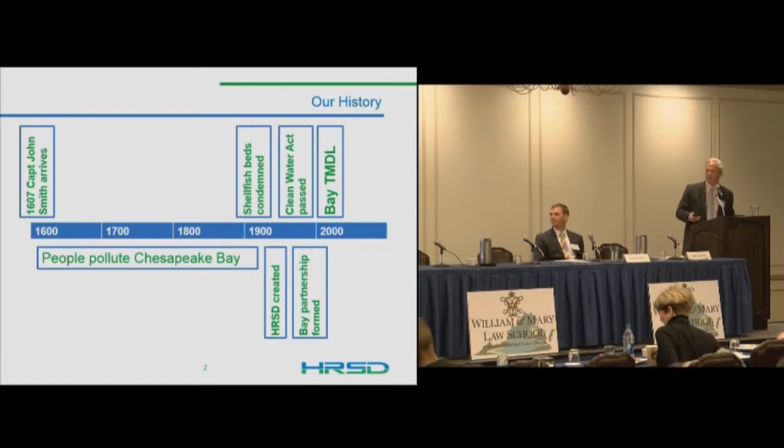So I always open up with a little quick reminder that we've been at this a fairly short period of time because John Smith was referenced earlier by Louis. He was the first person here to start polluting the bay, and we've been trying to clean it up only for a short period of time on that timeline. So we were formed in 1940. And we were actually formed out of, we're talking all morning about oysters and aquaculture. The reason we were formed was in the beds that were condemned in the Hampton Roads in 1925. People were getting sick from eating the oysters there.

Of course, at Old Dominion, we don't move too quickly. It took about 15 years to come up with a proposed solution, and we actually went to public referendum in 1938, where it failed. We couldn't get along as a region then either, and it was a nasty political battle, and the folks for forming a regional entity to deal with clean water were not able to get a majority, and they retooled it and came back in 1940, and we actually were formed by public referendum. So we like to think of us as the first grassroots water-focused environmental organization in Hampton Roads.

So who are we? We're a little different. For those who don't know, we are a political subdivision of the state. The governor does appoint our commission. We have 8 commissioners. They're typically citizen leaders. It's not a lot of cachet when you help your buddy get elected governor and you get appointed to a sewer board. Cocktail party conversation just isn't as good. So we get folks that really just want to give back in service to the Commonwealth, and we've got a great commission, very supportive of clean water and doing the right things for the Commonwealth.

Just quickly, we serve about 1.6 million people, or roughly 20% of the folks in the Commonwealth. We have a large service area. It goes from the Middle Peninsula all the way down to the Carolina line. And so we process about 150 million gallons a day. We've got capacity to about 250. It's a real challenging business proposition when you really sit down and think about it.

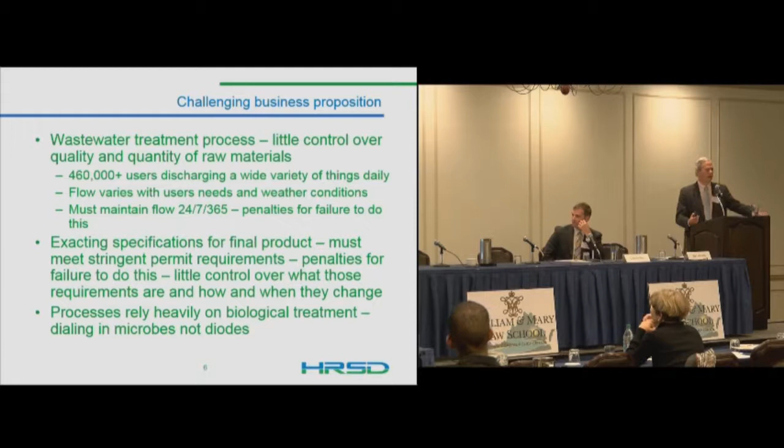If you were in manufacturing, you had no control really over the quality or quantity of your supplies that came in, and you had highly regulated and exacting specifications for your product at the other end. I don't think many of you would go into that business. It's a very challenging business from that perspective, and that's really what we're after.

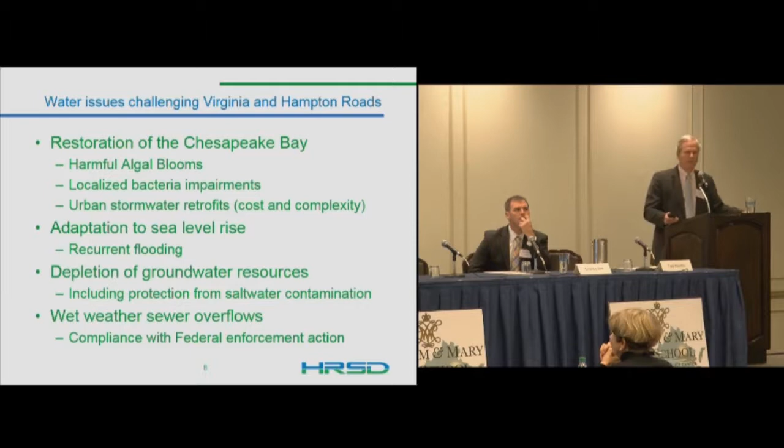So really we've identified these as the 4 main water issue challenges for the region. I don't think any of us would argue that restoration of the Chesapeake Bay is number 1. And we do use the term sea level rise, but we did throw in the appropriate politically correct Virginia term of recurrent flooding. And then depletion of groundwater resources, which is an interesting twist for us, including the protection from saltwater contamination. And then we'll talk a little bit about wet weather sewer overflows, which nobody likes coming out of the pipe, but it does happen from time to time.

So this is really current state of wastewater in Hampton Roads. We basically treat our water to very exacting standards and discharge it at the end of 3 major rivers. It goes right into the bay and out into the ocean with no downstream uses, no beneficial use from that point forward. In our region, about 80% of the water we treat comes from surface water sources, and about 20% is from the ground.

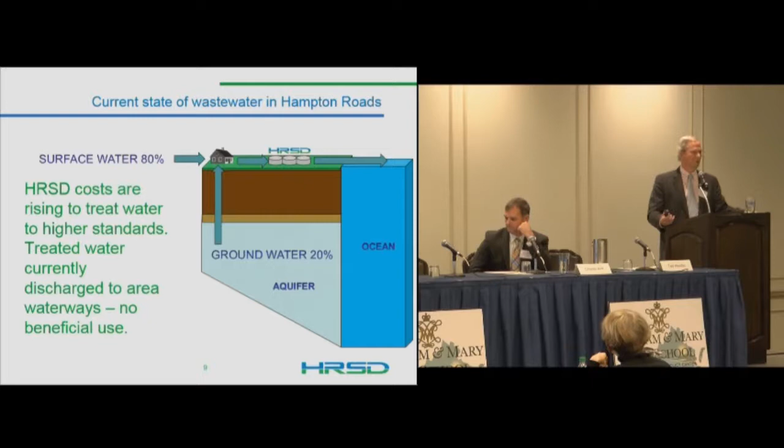So the regulatory uncertainty is really the driver behind this from our original concept. We were sitting around talking about what it looks like in 50 or 100 years. You heard some of the Planning District Commission folks talking about the need for forward-looking planning, and that's what we were doing when we started really thinking about wastewater treatment as you move forward, because frankly, it is a pretty archaic system. We just, as a country, actually as a world, just send it downhill to the lowest spot, and we've added on some treatment over the years, but we've pretty much been doing it the same way since the Romans figured out you just push it away from your developed communities.

But as we looked forward and tried to understand where we would be, the one thing that came into clear focus for us was that regulations will continue to change on our business on a fairly frequent basis. The pace at which things are found and discovered outpaces the ability for us to remove them from the wastewater. So the technologies to detect are advancing faster than the technology to remove. We recognized that we wanted to look for ways we might be able to find some regulatory stability going forward. And this is an example of some of that uncertainty.

So for the TMDL, total maximum daily load, Chesapeake Bay cleanup, we're part of 3 different river basins: James, York, and Rappahannock. On the James River, 7 of our plants discharge, and we've got a waste load allocation for nitrogen and phosphorus for those 7 plants in total.

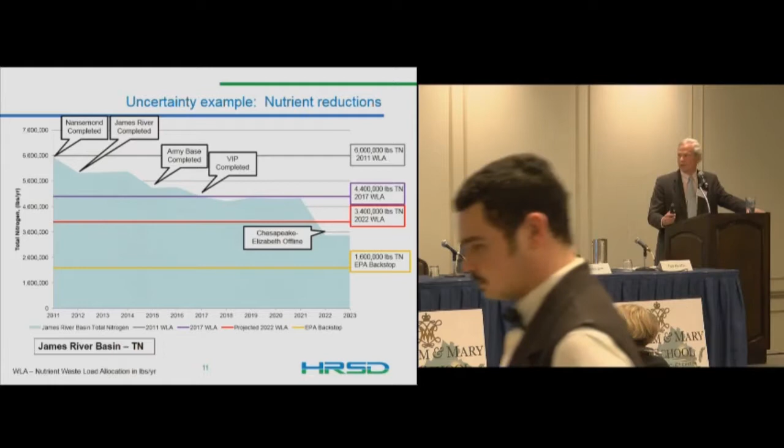Just to give you some idea, prior to 2000, roughly, we were discharging about 8 million pounds a year of total nitrogen into that James River watershed from our various plants, in total. In 2005, when Virginia started to address waste load allocations and passed the laws in 2006 and the regulations requiring us to reduce that discharge, our target was set, our waste load allocation was 6 million pounds, and we had 5 years to reach that. So that was 2006, established as a regulation and waste load allocation for HRSD.

Before we could reach that 6 million pounds, if you're following the timeline, 2010 is when the TMDL came into play. So the top line is the 6 million pound line we were targeting for, and each of those blocks represents at least a $50 million investment in infrastructure—2 of them represent in excess of $100 million. But by the time the TMDL came out, we hadn't even got to the first compliance year under the Virginia waste load allocation when it went from 6 million pounds to the red line of 3.4 million pounds in 2022. The delta between the 6 million pounds and the 3.4 is about $500 million worth of investment that we're making to get there.

EPA, in fact, I think Jeff Corbin may have actually made this statement a couple times with his Mr. Whiskers picture. The federal backstops under the TMDL really point to the point sources, to the wastewater treatment plants.

And so while 3.4 is our current goal, if it looks like we aren't going to make the TMDL from Virginia's perspective with agriculture and stormwater, we would face a backstop somewhere about 1.6 million pounds for this particular watershed, the yellow line. The difference in cost between the red line and the yellow line is probably about $750 million additional investment we would have to make to get to that point. So just keep that in mind.

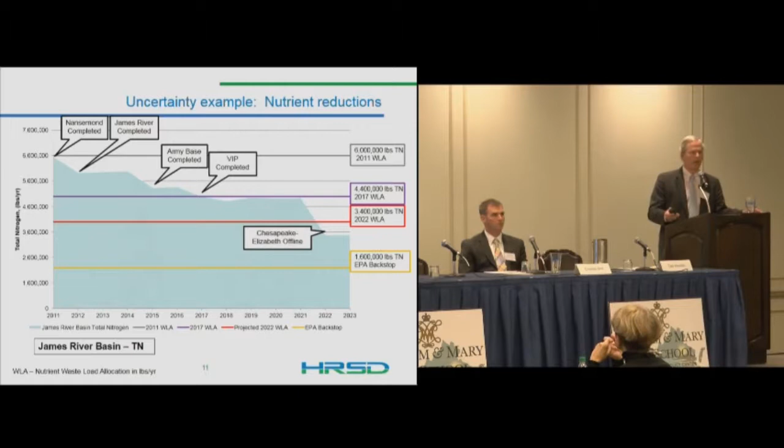That's the kind of changing regulatory environment that we really have little control over, but we're trying to plan around. So our thought process was, let's take our water all the way to drinking water, and maybe the regulators won't do anything more to us. Not saying we're going to get there, but we're challenging anyone to think of something else we can do with it.

But the idea of adding advanced treatment to the end of our existing treatment plants, which are very highly treated water now, and make it all the way to drinking water, we get a very valuable resource. And the idea was, what could we do with that valuable resource?

And about that same time, DEQ started, after years and years of trying to sound the alarm about the groundwater issues in eastern Virginia, really started getting folks' attention with some proposed permit cuts. So these things came together in our minds, at least, that if we're going to make drinking water and there's a groundwater shortage in a drinking water aquifer, perhaps those two need to go together.

So our thought was add advanced treatment, go to drinking water quality, pump it into the aquifer, and then we had these other benefits that we hadn't even started out thinking about, which was first, of course, reducing our discharges to the Chesapeake Bay. So that earlier graph that showed the 1.6 backstop, we actually get way below that, and I'll show that to you in a minute.

We reduce our discharges by 90%, total discharge into the Chesapeake Bay. We reduce the rate at which land subsides. We've got a lot of USGS work going on around this, but it looks like we can slow down the land subsidence. There's a portion of it related to aquifer compaction. I'll talk about that for a minute.

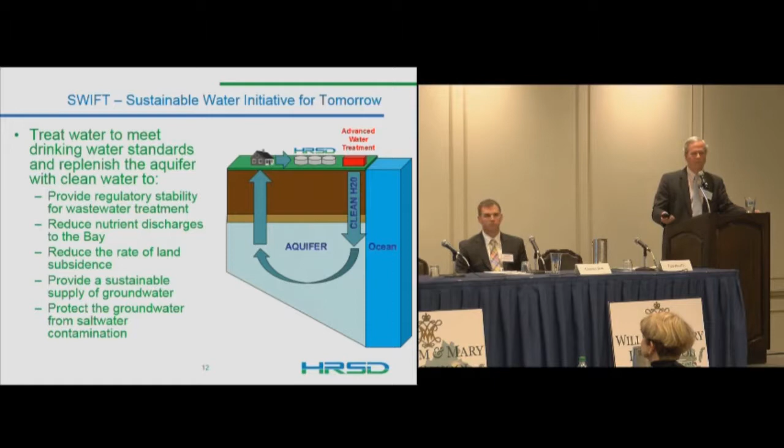So the first piece of this is treating wastewater to drinking water. And again, you're free to taste it over there. It's not exactly new science. It's been done throughout the world, and even in Virginia, Upper Occoquan's been doing indirect potable reuse for a number of years.

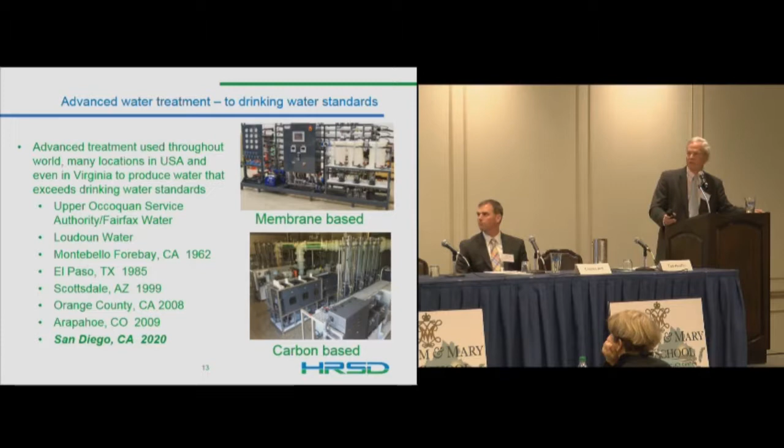We're testing two processes, and Charles is going to talk a little bit about the technology when we get towards the end of this.

Putting the water into the ground, again, nothing new there. It's being done in many places in the country, including the city of Chesapeake, which uses the aquifer as a storage area. They use an aquifer storage and recovery unit, and they've been doing that for many years and have put about 2.8 billion gallons of water into the aquifer successfully and pulled it back out.

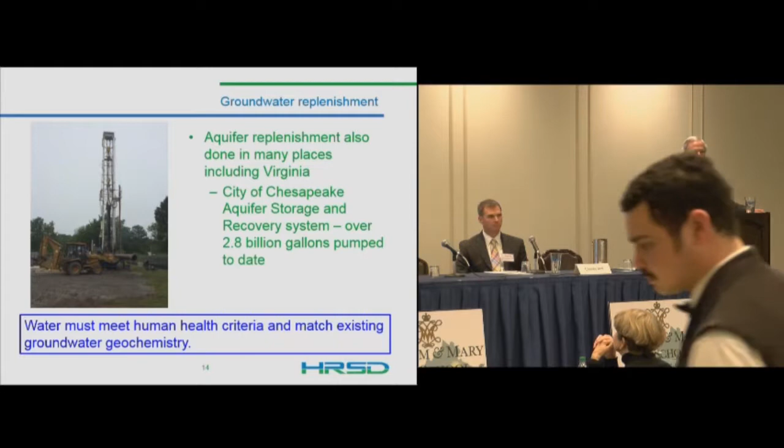A lesson here, and we'll talk a little bit more about that, is that you need to match the groundwater chemistry if you're going to be successful there, and we'll talk about how we plan to do that. So really hitting these few water issue challenges one at a time.

The restoration of the bay, same chart I showed earlier. The white line's been added to the bottom. That would represent the discharge. So we won't eliminate our discharges entirely. There'll be wet weather periods when we will have to discharge, but we will have reduced our nutrient loads significantly.

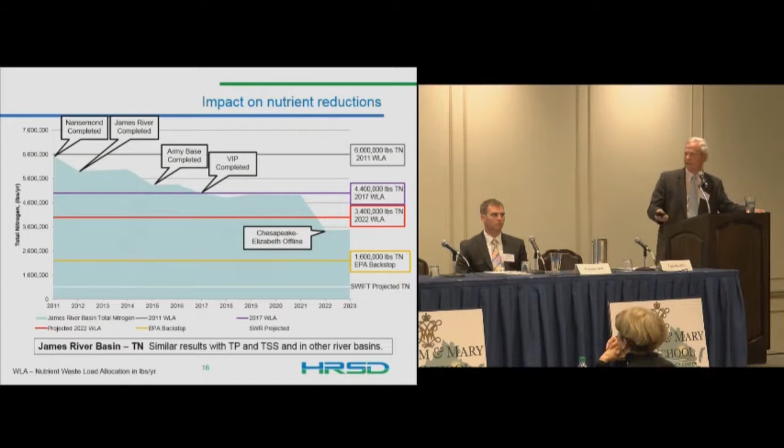So in this case, in the James River, total nitrogen will be down around 500,000 pounds a year as opposed to our 3.4 million pound allocation. And so that gives us some opportunities, and especially for the Hampton Roads area, we're really focused on how we might be able to offset some stormwater needs through some trading.

So what that says is we potentially can trade with our MS4 localities in Hampton Roads and eliminate their need to do retrofits. And there's still a lot of work to be done on the stormwater side going forward to make sure that we don't continue to increase load. And there's also the recurrent flooding issues that our stormwater utilities need to be dealing with. But this is sort of not having to go back and deal with the sins of the past. We can trade that off and get them out of the retrofit business.

According to the estimates, that can be anywhere from $1 billion to $2 billion savings for the region. So again, we've already discussed the fact that by doing this, we potentially save a $750 million unknown if we had to go down to backstop levels. And here's another $1 billion to $2 billion savings for the region as a result of this project.

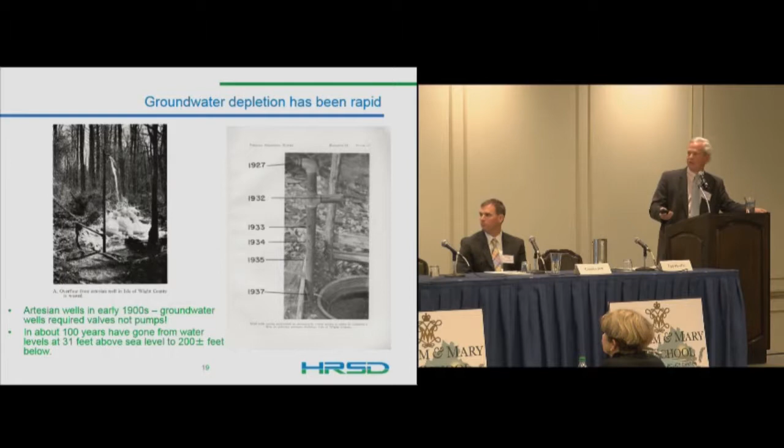So a real good indication that as we started using the water out of the Potomac Aquifer, we were already starting to draw the head pressure down early in its lifetime. And since that time, over the last 100 years, we've brought down about 200 feet since then.

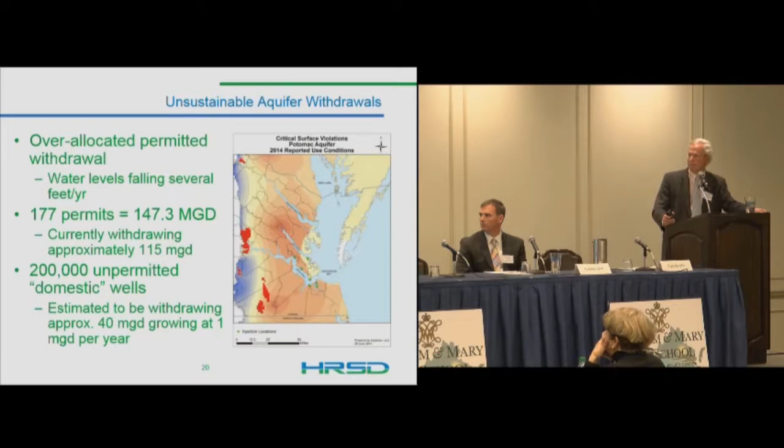The travel time of the water is related to that, and it's a little hard to understand because what I just showed was pressure, not actually water moving through the pressurized aquifer. When we put our water in, the modeling can't really show us a map. The model is done in 1 mile square cells, and over a 50-year simulation, our water doesn't move out of that 1 mile from our injection well, so it moves very, very slowly. They estimated anywhere from 3 feet to 30 feet per year is roughly how fast that water moves. It obviously won't all move at the exact same speed, but essentially it moves very slowly away from our wells. So again, we're talking pressure, not actually water moving through the aquifer.

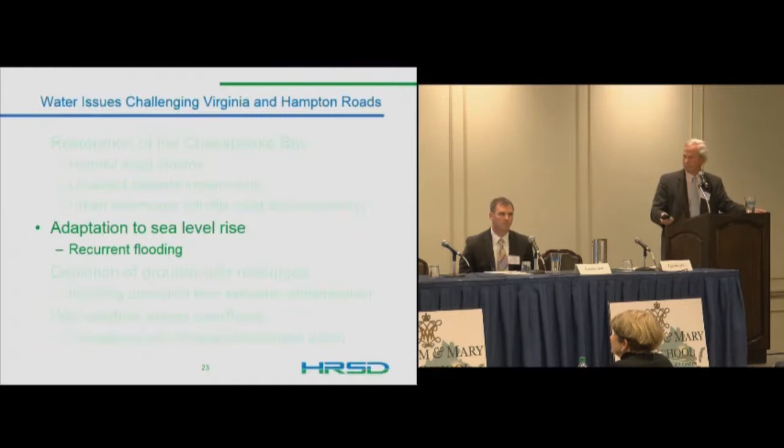Adaptation to sea level rise: USGS has estimated that about 50% of our subsidence issue in Hampton Roads is due to aquifer compaction. So 50% of sea level rise in our region is due to the land settling, and 50% is due to the ocean rising, so the net is 100%. About 50% of that land subsidence issue is estimated to be due to aquifer compaction over time from over-withdrawal.

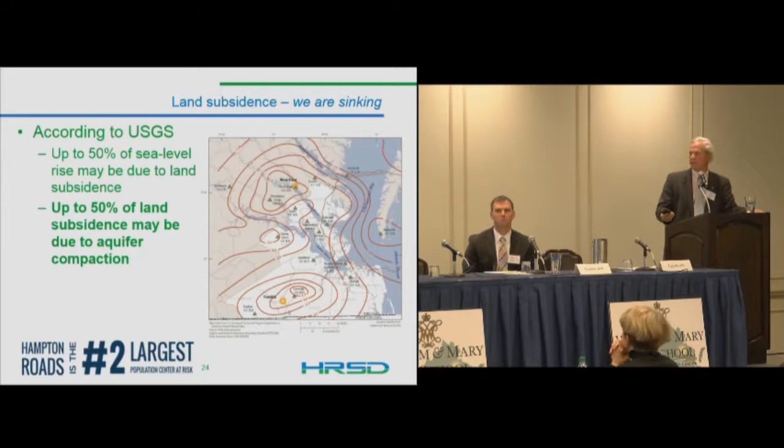USGS did these contours several years ago. The greatest rate at which our aquifer is compacting is in the areas where we're pulling the most water out. So it definitely has a correlation, it seems to make sense. And this is some evidence of that impact.

There are 2 extensometers that were put in by USGS back in the 80s to measure basically the difference in thickness between bedrock and the surface of the land. Obviously, if you talk to geologists, bedrock moves too, but this is just an instrument that measures the distance between the bedrock and the land surface. Essentially, it's a rod that goes down to bedrock and then is attached to a beam at the surface level.

These 2 instruments, one in the Franklin area, one in Suffolk, were basically abandoned due to lack of funding in 1998. I see David's head nodding, which seems pretty crazy, but it is a federal program, and you know what happened - they lost funding. They no longer were monitoring them, but they did continue to go out every now and then and check on them. It was simple machinery, nothing electronic at the time.

The picture taken in 2002 on the left, with the yellow line, shows it had essentially leveled out at that point. They went back in 2015 and took a picture of the same instrument, and you see the sharp angle. When I first saw the picture, we're all talking subsidence - I thought, wow, we're really sinking. But then you process what they're actually looking at there, and that's land rising 32 millimeters over that period of time. So, of course, that begs the question: if we're talking about subsidence, why are we showing a picture of land rising?

The Franklin paper mill shut down in 2010 for about 3 years, then came back on at a significantly lower withdrawal rate. So really, we can theorize - we don't have data from all the years it was shut down - but most of this recovery likely occurred during that 3-year shutdown. We saw some recovery of land, roughly 32 millimeters in that area, in about 3 years. This really holds out some hope that if we put water back in the aquifer, we may at least slow down, stabilize, or even recover.

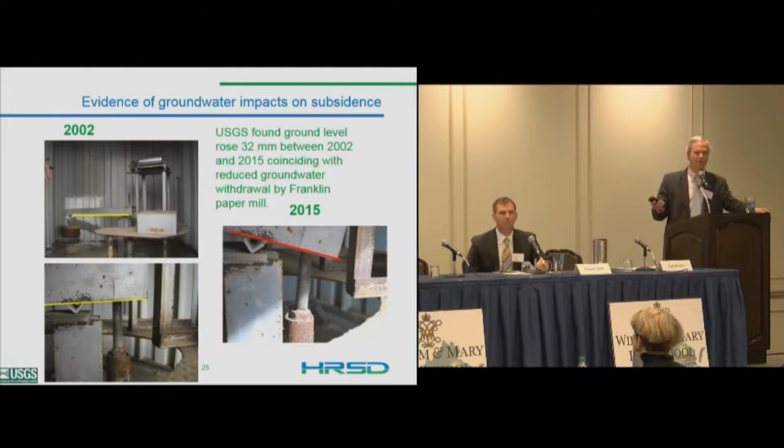On whether compliance issues tie in from a funding and scheduling standpoint, the top chart shows what shows up at our treatment plants, the blue line. What comes through your water meters, our customers' water meters, is the green line, and the difference is really what gets into our system from inflow and infiltration—rainwater that gets into our system. It is a separate system for those of you from other parts of the state; it is not a combined sewer system.

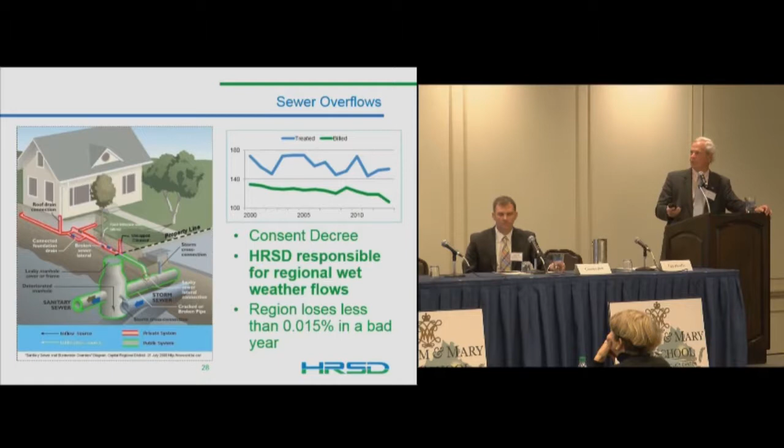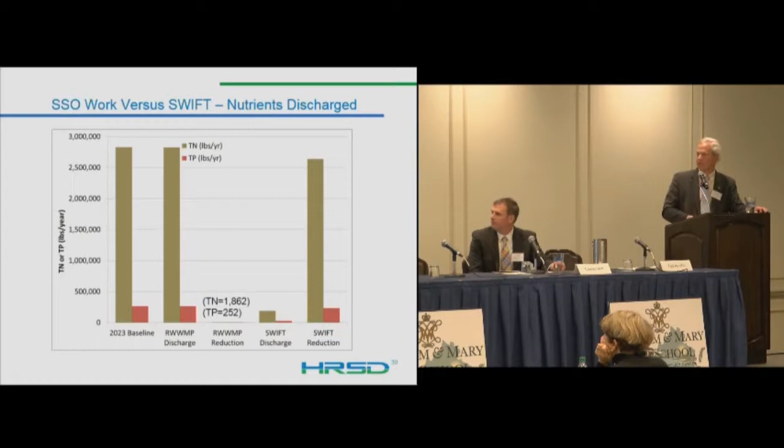This again shows nutrient loads, TN and TP, pre and post SWIFT.

On the sewer overflow issue, we think a better approach is needed. We're under a federal consent decree to eliminate sewer overflows, estimated at $2.2 billion. We owe a plan to EPA in 2017 that will help us reduce that, and that's where we get the reduction of about 270 million gallons of overflows.

We're finding better ways to deal with our bacteria-impaired waters locally by going out and looking for the actual cause of the bacteria impairment. We've got a small group now working with localities to do that. We've had some success on the Lafayette River and some success in Hilton Beach. We're not claiming victory yet, but we've been focused and working with Newport News in that area. We think we can do a lot more on the bacteria impairments rather than just spending the $2 billion on overflows.

So SWIFT—this project, the idea of putting the water in the ground—is being done under a phased approach. A lot of folks think it's moving too slowly. I know at the State Water Commission there were comments about why it can't go any faster. It's not being held up by any regulation or other issue; we're just moving as quickly as possible. We started this only 2 years ago.

A feasibility study done by a consulting firm did the initial modeling that showed us it could actually happen. We've been working with regulators and policy, trying to build policy support around this. We've actually done these pilot treatment facilities now—we ran those, and the water I brought today comes out of our pilots that have been running for about 6 months. We awarded a contract this morning for a $25 million, 1 million gallon a day demonstration facility in northern Suffolk.

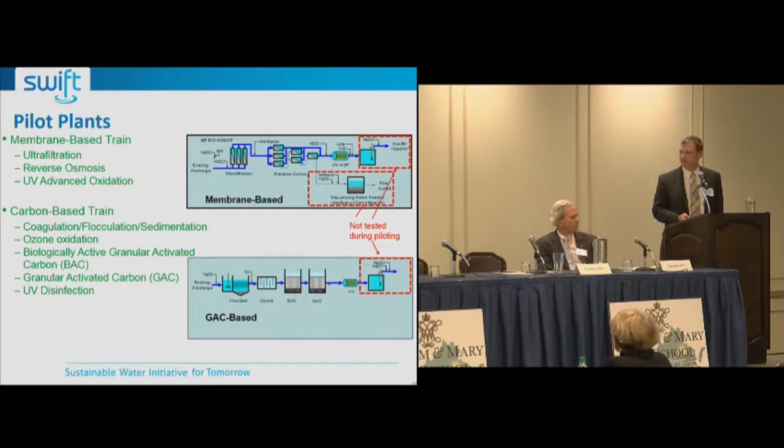From the objectives, what do we want to achieve with this? One is to compare the finished water quality between these 2 approaches. There is a bit more experience with the reverse osmosis approach. We've already shown, however, that the carbon-based approach is equally and perhaps maybe even more effective, more protective in a lot of ways. Gain some operational experience, establish some design criteria, monitor for compatibility with the aquifer, and really understand removal of emerging contaminants and other forward-looking parameters.

So if we think about this, there's really 3 things that we're concerned about. We have to make water that is drinking water quality, and there are a lot of regulations that define how that needs to be done. That protects with respect to pathogens and chemicals and metals and so on. So from our standpoint of what we're concerned about, we need to make sure we're compliant with what is really would be characterized as drinking water quality.

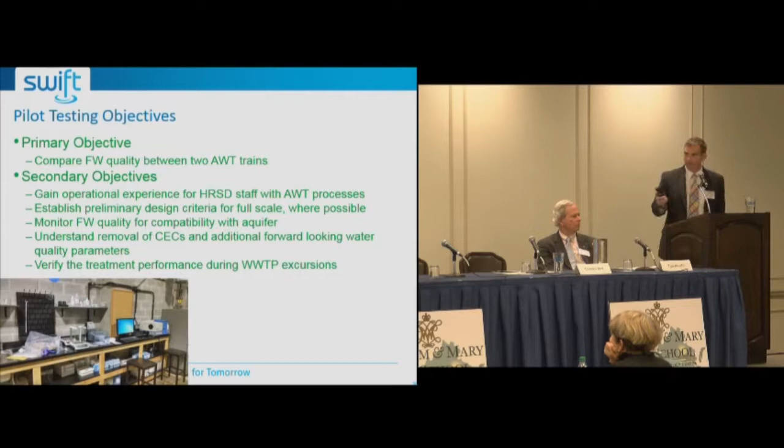But in some ways, we need to go way beyond that because of the starting point in this case, and we understand that. So we need to ensure excellent protection with respect to pathogens and excellent protection with respect to organic chemicals, particularly focused on the pharmaceuticals, the hormones, the emerging contaminants that everybody is quite concerned about in this case, and that's a strong reason for doing this pilot.

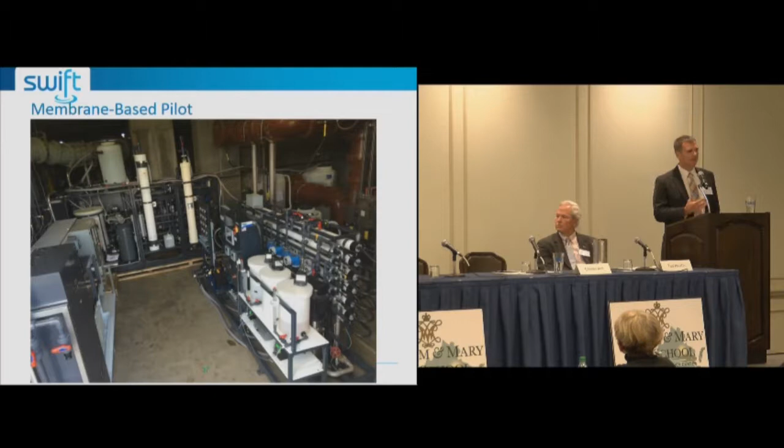So this is what the pilot facility looks like. That's the membrane-based pilot, ultrafiltration in the back and reverse osmosis in the front. To put this in perspective, this is about 1/2000th scale of what it would be when we build out. Ted mentioned the demonstration facility, that's about 1/20th scale. So we go 1/2000, 1/20, full would be the intent here.

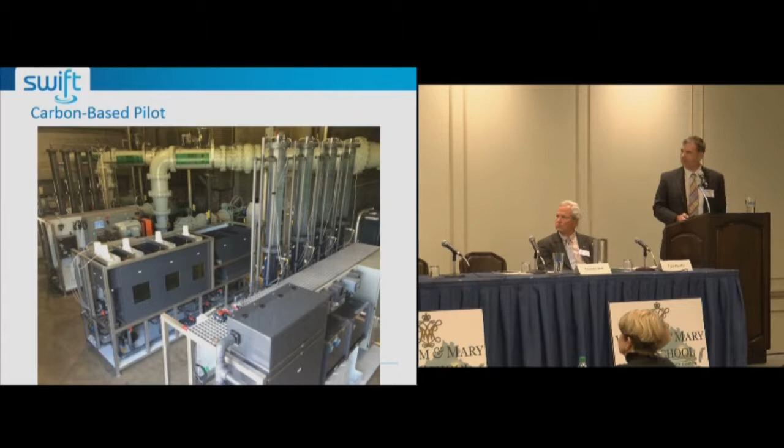But what is equally complicated, and if not much more complicated, is the sampling and analysis that goes along with this. So from an investment standpoint, the sampling and analysis is probably twice the investment of the pilot. We have analyzed for hundreds of compounds, lots of different viruses, bacteria, and protozoan pathogens, and so far, very good.

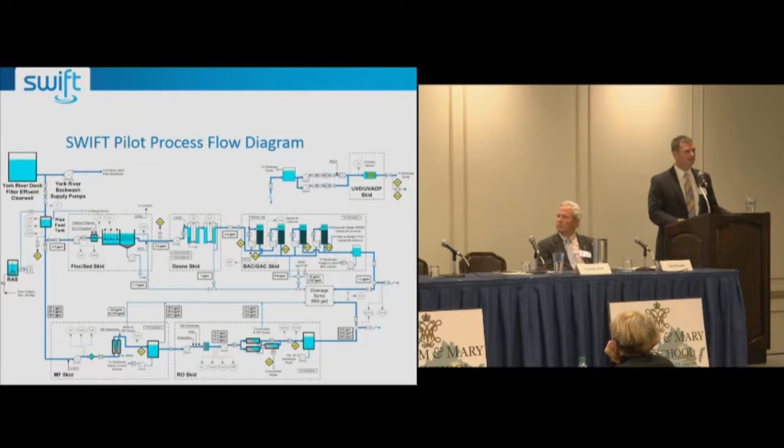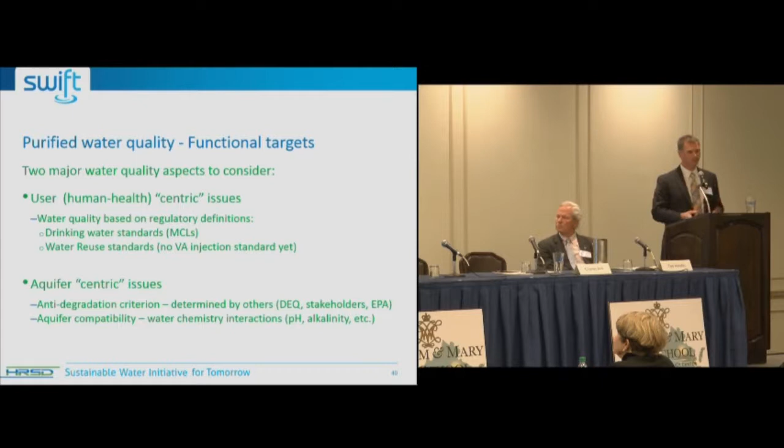So what are we interested in here? We're interested in the human health issues, drinking water, maximum contaminant levels. We don't have an injection standard in Virginia yet. But we're also interested in aquifer-centric issues. So we have an anti-degradation criterion that we need to think about, and we have to make sure that the water is compatible with the chemistry of the aquifer, and that's focused on things like pH and alkalinity and hardness.

So preliminary results, both trains are meeting drinking water quality standards. In fact, we're well below that. We don't have any trouble complying with those requirements. That's not even, we're not even sort of close in that regard. All primary MCLs are being met.

Our one challenge has been bromate. Bromate is formed as a result of ozonation. So if we add ozone, both for disinfection and for oxidation of organics and to make organic compounds more biodegradable, ozone reacts with bromide to form bromate. We've got that under control now. We knew that going into the pilot that was going to be a challenge. It took us some time and a bit of sweat to figure that out. We've got that solved, and we're way below the MCL for bromate as well.

All secondary MCLs, which are focused primarily on aesthetics, are being met with one exception. And again, we knew this going in. The carbon-based system doesn't remove salt, and that's a benefit from an aquifer compatibility standpoint. That's what we want. Unfortunately, reverse osmosis removes all the minerals, and in order to get back to a point where it's compatible with the aquifer, we have to add all that back, and that doesn't make a lot of sense. So we need to be protective. We don't need to remove all the valuable minerals.

The TDS is slightly high compared to the 500 milligram per liter, again, aesthetic standard. And this is for York River plant. We, of course, need to test this for the other plants. But sulfate and chloride are consistently low.

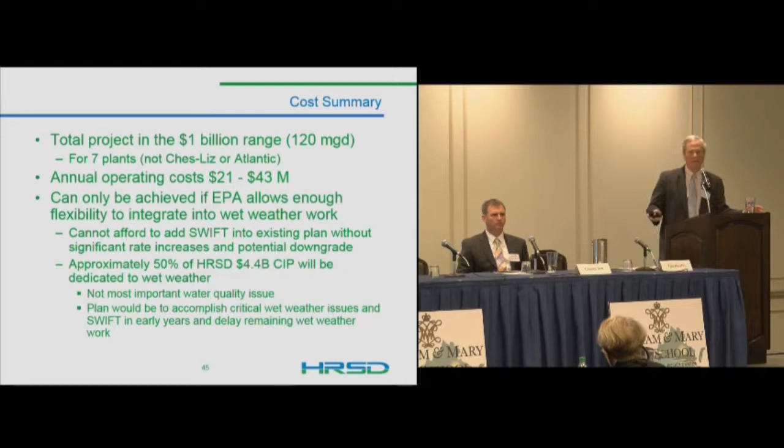So we went over the benefits. I don't think I need to belabor that—they're big. Why now? Well, for us, there is some urgency here.

I mentioned the consent decree. Our plan is due to EPA in October of 2017. If we submit that plan without this project and they approve it, we're legally bound to execute that plan and schedule, which pretty much closes the door on this opportunity for 20 to 25 years. We don't think that's acceptable, so we're really working hard to integrate this with whatever we propose to submit in October.

The TMDL deadline, 2025, is looming out there. We obviously want to have this in place and be able to do some of the trading and have some of the plans in place in Virginia's upcoming WIPs to show how we're going to make our TMDL goals.

The groundwater scarcity is going to continue to go downhill. The unpermitted withdrawals are estimated to be increasing at about 1 MGD per year, and that's going to continue. We don't know where groundwater policy will end up, but that's still a real concern over the next many years. And our treatment plants themselves will get hit with some additional regulations in the next probably 10 to 15 years.

Our timeline is we're finishing up this pilot work now. Those room-scale pilots have been operating for about 6 months. We'll start construction on that demonstration pilot at our northern Suffolk plant this January—I just signed that contract this morning. They'll be finished in 1 year, and we'll get about a year's worth of data. We'll apply for our permits so we can start constructing in the 2020 timeframe.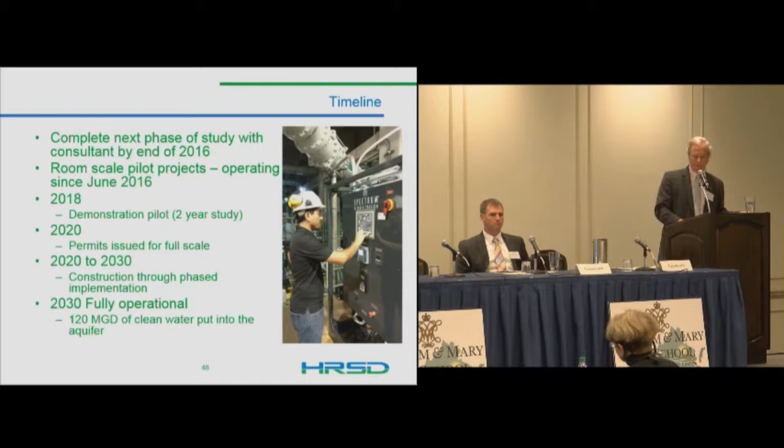EPA has been wonderful to work with on the permitting side for this. DEQ, VDH, everybody's been at the table rolling up their sleeves and helping us figure out how to make this happen. We've got a lot of support from both the congressional delegation and the governor, and we've been making a lot of news these days, and it's been pretty positive.

The reaction from the citizenry, which we expected to have a lot of the 'ick factor' negative uprising, has not been there. So I attribute that to the timing being right. A lot of other water crises in the United States and across the country and the world have really set the stage to have people more accepting of this concept.

And with that, I think we've got time for questions, right? Sure—nobody has any questions.

Thank you. Excuse me. Even though I'm no longer with EPA, I love to hear you say that EPA has been wonderful to work with, so thank you. I won't say that about all of them, but let me clarify—sorry about my earlier Mr. Whiskers comment. I meant that in the most loving of ways. Yeah, I know, Ted, you and Mr. Whiskers go way back.

So my question is about nutrients. Conceptually, I love the idea of this. I'm not a groundwater hydrologist, so I can't speak to the impacts it would have on land subsidence or saltwater intrusion, those things. But I know math well enough to know that taking 5 million pounds of nutrients out of the bay and going to zero is a pretty good thing.

But over 20 years of working on this, what I've kept hearing is we're bumping up against the limit of technology as far as removing nitrogen and removing phosphorus. And I kept looking, Charles, for the numbers in there—I don't think they were in there. As far as a discharge from a nutrient plant, 3 milligrams per liter is about the limit. Even with top-notch filtration, biological phosphorus is a lot lower than that.

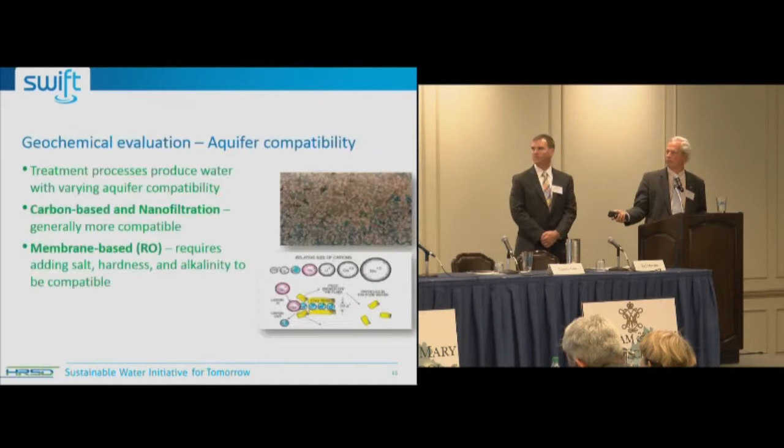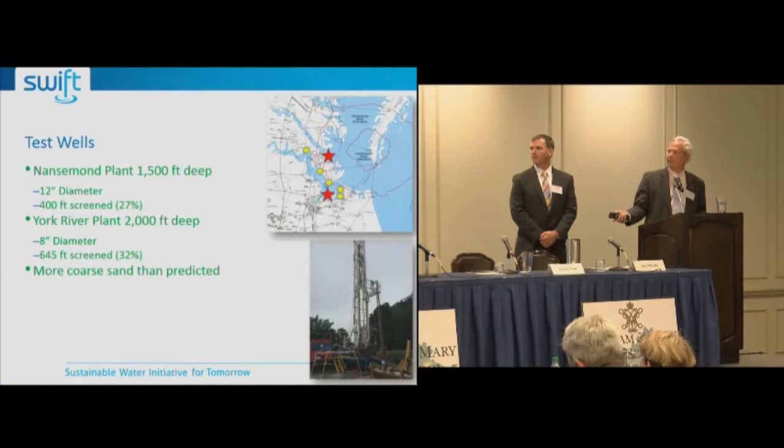You showed a chart about the swift discharge—would you expand on that? Is it highly concentrated, and where is it discharged, or what's it composed of? That's really not what we're discharging; it's just total volume that we've discharged. Let me get back to that slide. So that swift discharge, in that case, that's the TP and TN, that's the same, but I think this was the chart you're looking at. That is just our treated wastewater meeting our current standards during a rainy day. So the facility will be sized to handle flow that we see 95% of the time. There'll be a certain period of time that we'll have to discharge when it's beyond the capacity of those wet weather facilities.

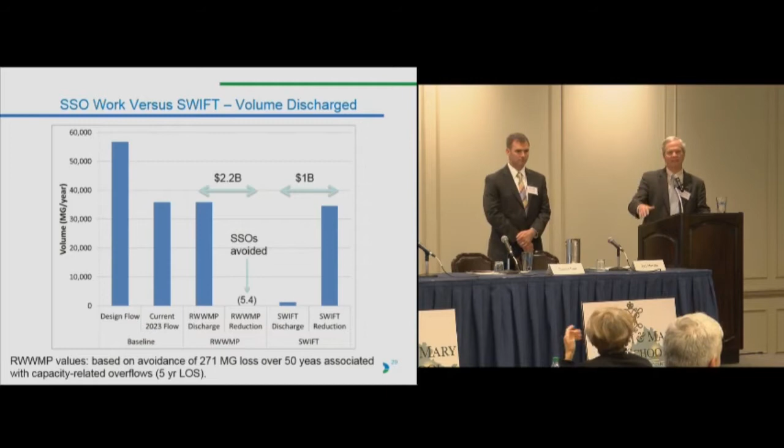I had a question. You showed the monitoring work done on the Franklin paper mill and the changes when the paper mill ceased operation for a period of time. I wondered, has there been anything done similarly with the West Point paper mill? My understanding is their use is about 10 million gallons a day of water—I don't know, maybe that's... I think West Point's closer to 20, Scott. Oh, well, more than what I thought. So I guess where I'm going with it, since that's obviously a significant user of water, have they been looking at more reuse technologies, and is the Commonwealth perhaps looking at incentives to have them reconsider the amount of their water budget? I'm probably not the best to address that.

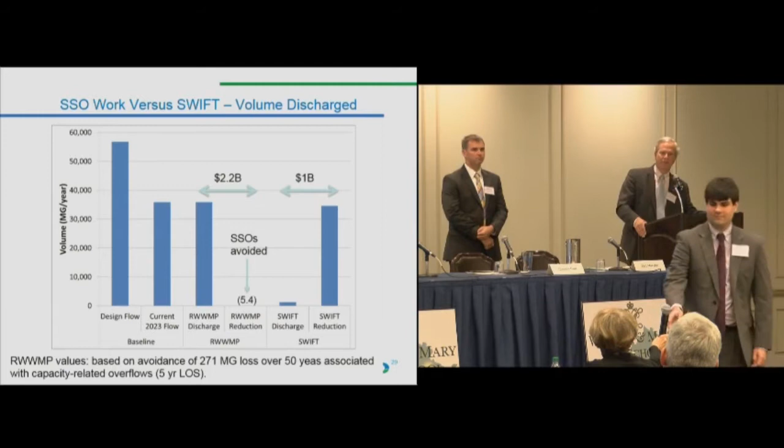I do know that they're working with DEQ on trying to find ways to reduce the amount that they withdraw on a regular basis. I don't think any of us are ready to say what that is at this point, but they are trying to find ways to do it.

A lot of times we get questioned, why don't we just pipe our discharge, our highly treated water, right to West Point so they don't have to pull any water out anymore? Sounds like an easy solution.

Well, it's fraught with some issues on our end. One, we've already been in that business. At our York River treatment plant, the refinery right there used to be owned by Giant. They entered a deal with us to take 500,000 gallons a day of our water. We added some infrastructure to treat it, not as highly as drinking water, but to meet their industrial needs. We did that very successfully, and up until about a month before we stopped doing it, they were talking about expanding to 750,000 gallons a day, and then they closed. The local folks didn't even know they were closing. They were sold and became a fuel depot instead of a refinery—a total change of operation for economic reasons outside of our control.

The big concern is we build a pipeline to West Point, at a cost of maybe $200 million, to try to deal with their water issue, and they shut down for other economic reasons at some point in the future. That's a big pipeline to nowhere, and then we're stuck with what do we do with the water at that point. You also lose all the added benefits of what I call the wireless solution to water challenges in Eastern Virginia, because you don't have to be at the end of the pipe. You can be anywhere in the aquifer and pull the water out essentially. So it's a much broader solution as opposed to just having a pipe go to one location.

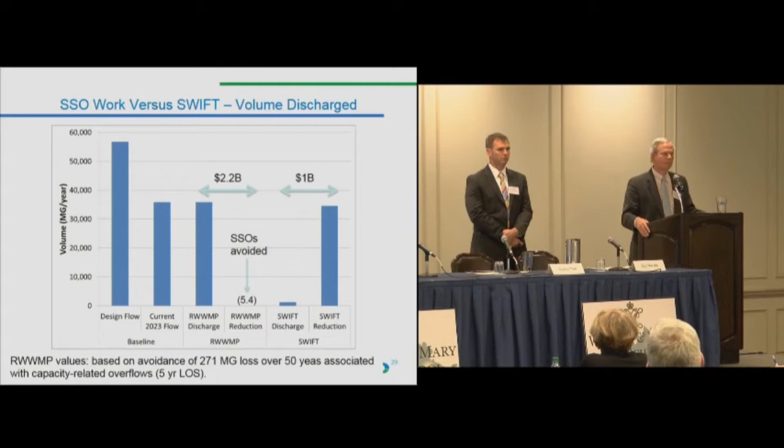My name's Brent Foltz, thank you.

Sure. So we've got a couple of big built-in benefits. We continue to operate and maintain outfalls and permits for each of the treatment plants. We'll have a series of critical control points, like any other water plant in the process. Anytime we hit certain limits and see that the process isn't working, we just start discharging again out of our outfall. We shut it down and fix that. So that's the operational controls—easy to do. We're not abandoning our ability to discharge at that point. There are some other complications if we had to do that long term, but that's it.

The other piece is, a lot of folks say, well, what happens if something goes wrong in the ground, in the aquifer? You're pumping away—you have a tracer well, you have a series of wells around, you're monitoring all the time to see when your water shows up, what's in it, have you done anything to the aquifer? The experience we've learned from Chesapeake and modeling is that because the water doesn't move very far, you just quit pumping at that point. Worst case, we'd have to pull water back out like Chesapeake does today. It doesn't move very far from the well. So you're really not causing any issues broadly beyond a very small area around wherever you're injecting the water. There's pretty limited risk, especially since it's been done widely in the United States and other places successfully—the risks are fairly low at that point.

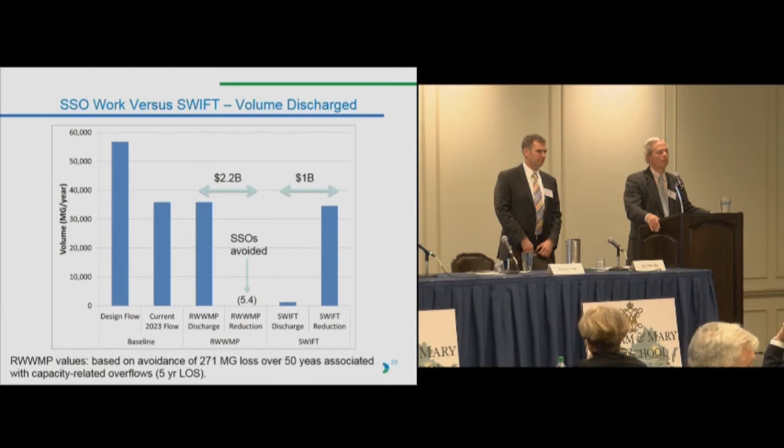Now, I'm not advocating that you stop what you're doing, but there are limitations to that. One of the things pointed out is the need for some ongoing research. I don't think that necessarily falls on you, but on the Commonwealth and the DEQ to put those parameters in place to monitor the complexity of the system as it evolves. Once again, I don't think it all falls on you, but it's a responsibility of the Commonwealth to participate, and for you not to put a financial guarantee on the system. Could you address those limitations?

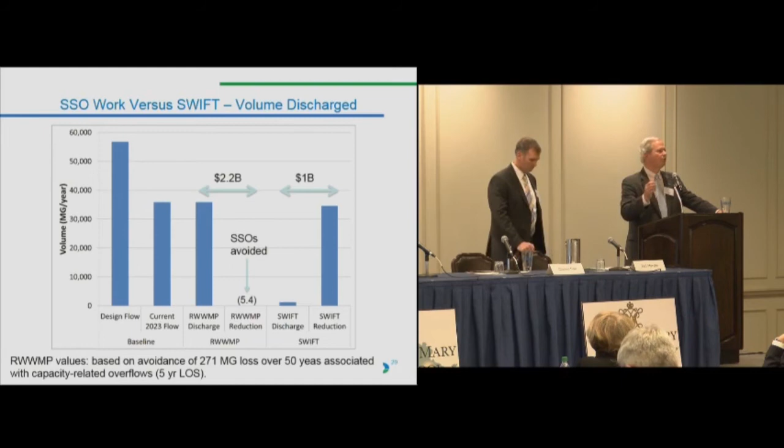Sure, and obviously modeling is the only thing we've got, and I'll say all models are wrong and some are useful. We're hoping we're using one that at least compares the prediction of disaster versus the prediction of recovery. So we're using the same model, we aren't in dueling model land. But to your point, I firmly agree with what you're saying about policy around long-term monitoring and trying to figure out what that looks like, and we're very open to participating in those discussions.

I think the model for Virginia is the Upper Occoquan system, where they created the Occoquan Monitoring Lab, part of Virginia Tech. It's long-term, constantly monitoring what's going on. We probably need a similar model. It might not be the same model, but something similar to monitor us going forward, because whoever said it, I'm not always going to be here, and I wouldn't believe me either that says HRSD is always going to do the right thing for the next 100 years. So we do need something to assure the Commonwealth that this continues to be done correctly, monitored, and looking at the long-term implications. But I would agree with that. I think we've got a model right here in the state that's been very successful since the 70s, and that'd be a great place to start.

Are there any additional questions? Our demonstration facility that we're getting ready to build, we're actually building research space and office space in anticipation that maybe that model ends up happening and they need a house. So we're very much in favor. I think your next panelist, hopefully Mike, can address some of the Orange County experience. Mike and Jeff can talk about that. We're also having an independent third-party expert panel reviewing what we're doing at arm's length from us during this process. So we're trying to build all that in, but I do think the Commonwealth has a long-term commitment to this as well.

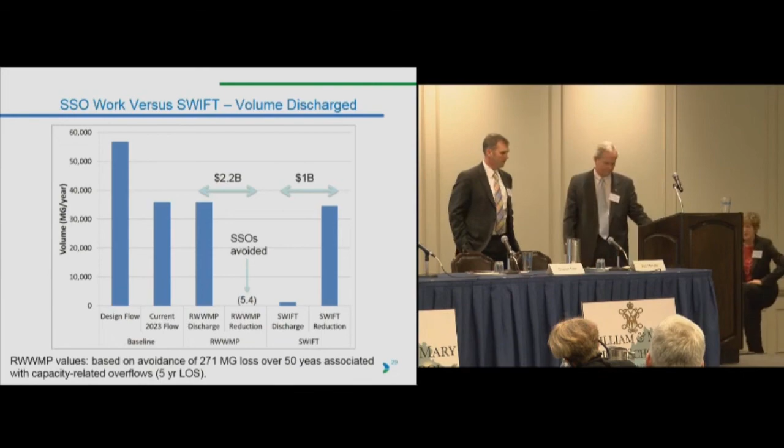Thank you all. It was a terrific panel. Thank you. Thank you.